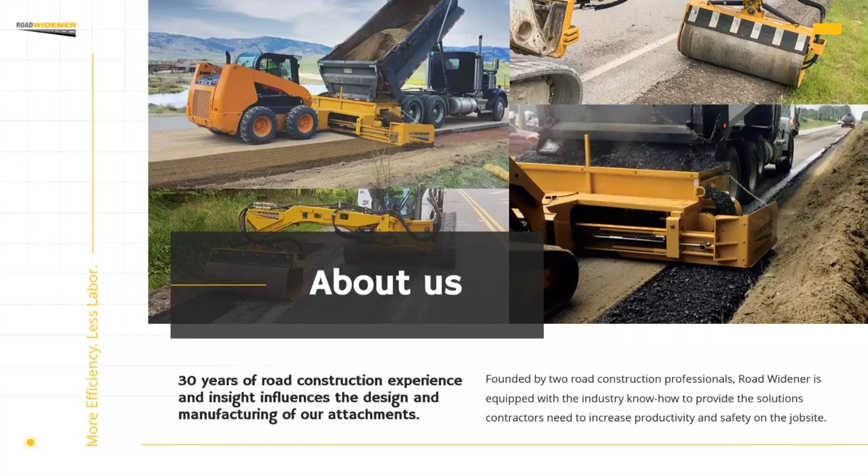We continue to improve on existing lines, as well as develop even more innovative construction products that will help our industry thrive. We are always listening to the voices of our customers, and if there are any pain points that you feel attachments could help with in your daily lives, we'd love to hear from you. While at first our products were designed for the road construction and maintenance industry, we're now seeing a market for our attachments in the utility construction sector, primarily for trench backfilling and trench compacting.

Today, we will go over some of the opportunities to address challenges within the utility market with specialty attachments. I'll also share a couple of case studies on how attachments have been used effectively in other operations. The goal of this webinar is for you to come away with information on how you can increase efficiency, safety, and productivity through the use of attachments in your operation.

Some of the current trends in utility construction are prompting many utility operations to consider new solutions. Investment in utility projects, both here in the U.S. with the infrastructure bill and around the world, is at record levels. It is estimated that there will be $952 billion spent by 2026 globally on utility system projects. Safety is a top priority with campaigns such as Road to Zero and strict safety regulations in general. Today alone, I read that the OSHA Directorate of Construction stated that a worker is 3 times more likely to die on a construction site than in general industry. So safety is really important.

In trying to keep the job site footprint smaller, it requires smaller, more compact equipment. If you are dealing with traffic situations, attachments versus larger machines can help to reduce the amount of space that you're taking from traffic flow. Hiring and retaining people is difficult, so we need to be looking for ways to accomplish tasks with fewer people. A growing utility market requires increased efficiency from operations, completing projects on tighter deadlines. More projects exist, yet the timelines are not changing, or expectations aren't changing.

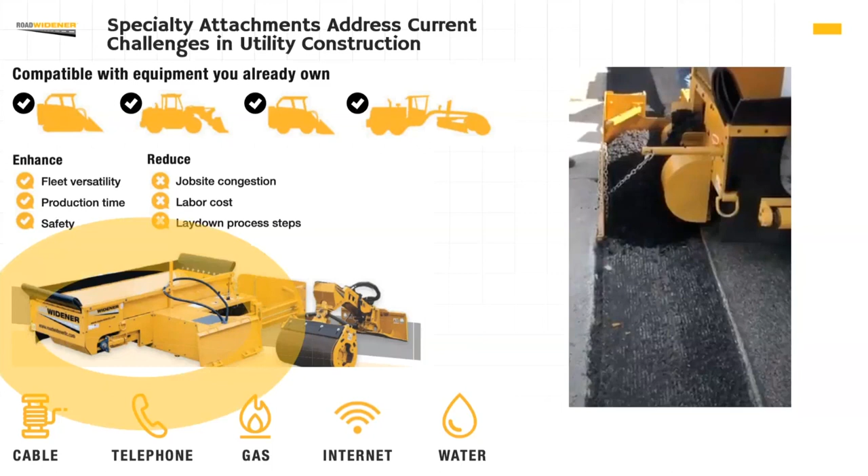Material placement attachments allow contractors to complete a job that was formerly manual and 4 steps with fewer workers, in just a 2-step automated process.

Material placement attachments are 1/5 the cost of self-propelled equipment, so the return on investment is much quicker with the lower priced attachments.

Material placement attachments offer lower transportation costs because they fit on a common width trailer with their host machines. You don't need an extra lowboy and driver to mobilize the attachments to the job site.

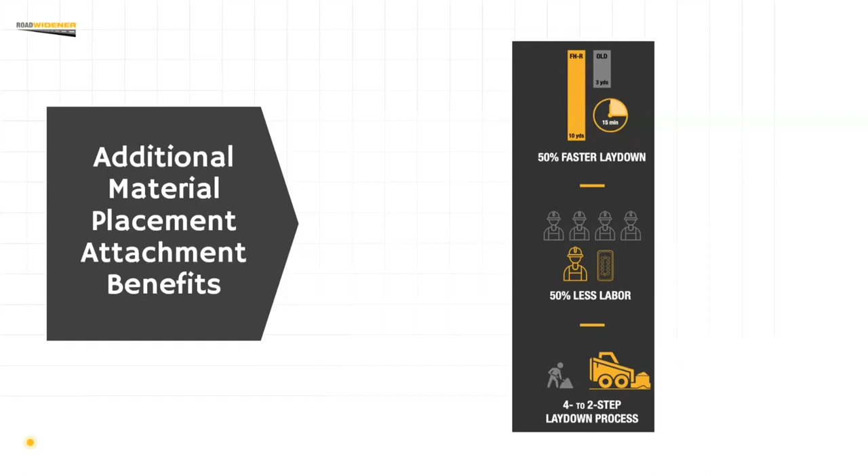Remote controlled operation enhances safety by allowing the operator to stay in the host machine. They're easily maneuverable around obstacles such as power poles, signs, and guardrails. There's dual and single discharge models available with laydown widths ranging from 1 to 6 feet.

The first case study I'd like to share with you is the Siskiyou Telephone Company. They've been serving Western Siskiyou County in California for 125 years, and were seeking alternative methods for their telephone and internet line trench backfilling applications to simplify their process.

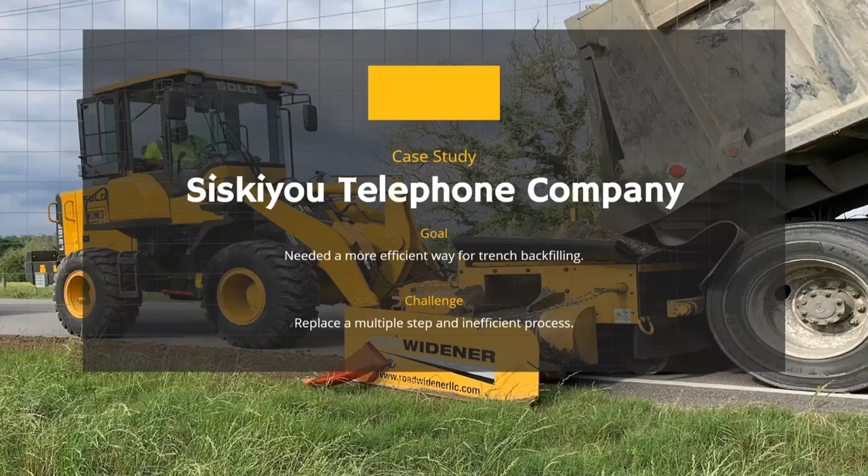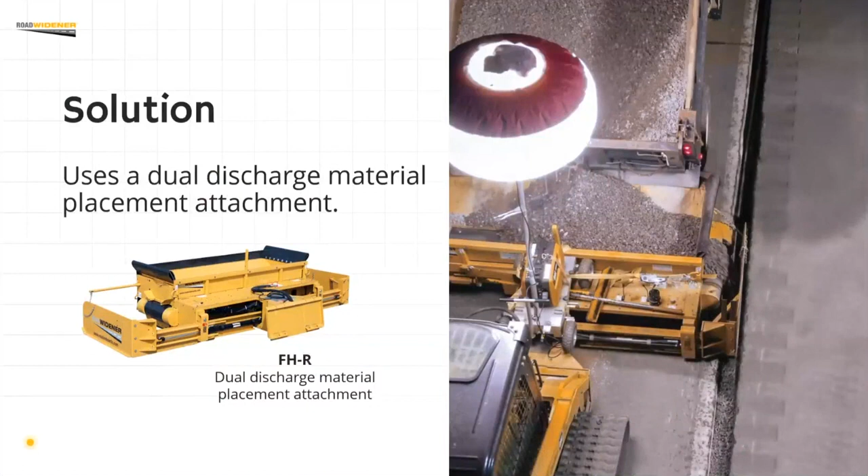Siskiyou worked with their local dealer to try the FHR dual discharge material placement attachment. What did they find after using it? It helped increase the versatility of their existing equipment while eliminating the extensive processes they previously had to take to get the job done. Using a dual discharge attachment allowed them to precisely lay down 1,000 to 1,300 feet of backfill per day.

Using traditional methods, it would take up to 15 minutes to lay 10 yards of backfill material in the trenches, but the company can now do it in as little as 3 to 5 minutes.

Remote controlled operation allowed the contractor to only have one operator in the cab, focused on ensuring a clean line of material along the road, while they assign remaining crew members to other job site tasks.

County officials also expressed their appreciation for the equipment due to its low traffic interference, precise material placement, meaning less debris on the roadway, and the lightweight design minimized damage to the road.

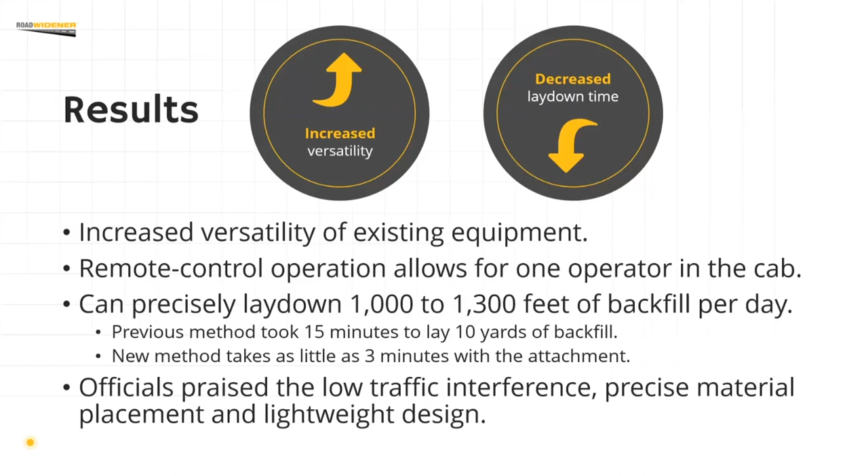The FHR offers unrivaled efficiency by taking what was once a 4-step trench backfilling process and making it achievable in just 2. The attachments seamlessly fit into their business and have significantly improved their trench backfilling, productivity, and bottom line through the equipment's ease of use, accurate material distribution, and quality placement, even in hard to reach places.

Now I'd like to discuss the benefits of roller attachments in the utility construction industry.

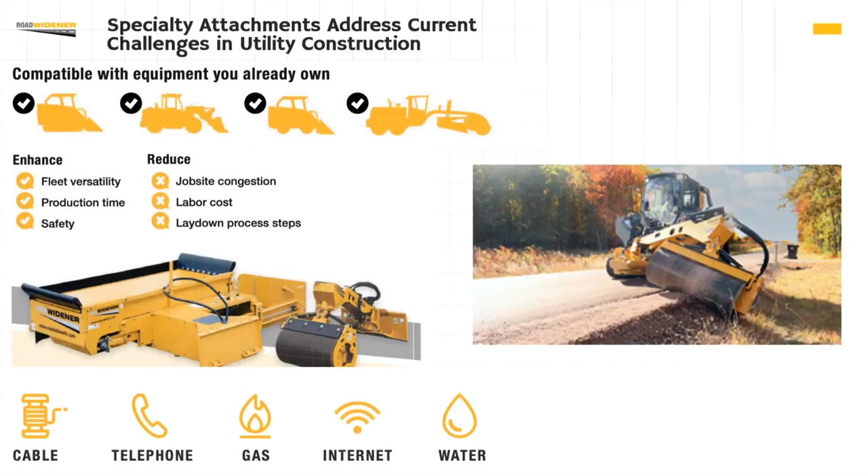Our offset vibratory roller is a patented design. It has unparalleled safety when compacting trenches and otherwise difficult areas to reach. These attachments offer remote control capabilities for convenient and effortless operation.

They work with standard flow hydraulics. It can be used on high flow hydraulic machines, but they must be set to standard flow. The host machines provide a separate source of power for the compaction drum, and thanks to the offset arm, stability and safety for the operator.

With this setup, an operator can now drive the host machine on flat ground while the arm extends to the furthest, steepest edge of sloping road shoulders and ditches, while still being able to compact flat surfaces too.

We often hear at trade shows how, oh, Joe tipped over the roller last week. Luckily, Joe is usually still here, but we have had customers who came to us to purchase a roller shortly after having a serious accident involving an employee, and unfortunately, a few of those were deaths.

I don't think any of us as employers ever want to send an employee home injured, or even worse, not home at all. If you look at it this way, an attachment investment is equal to one workers' comp claim. I know from my financial days, it was always about trying to keep costs down by keeping safety of utmost importance. You can lower your insurance premiums and increase your safety ratings with offset compaction attachments.

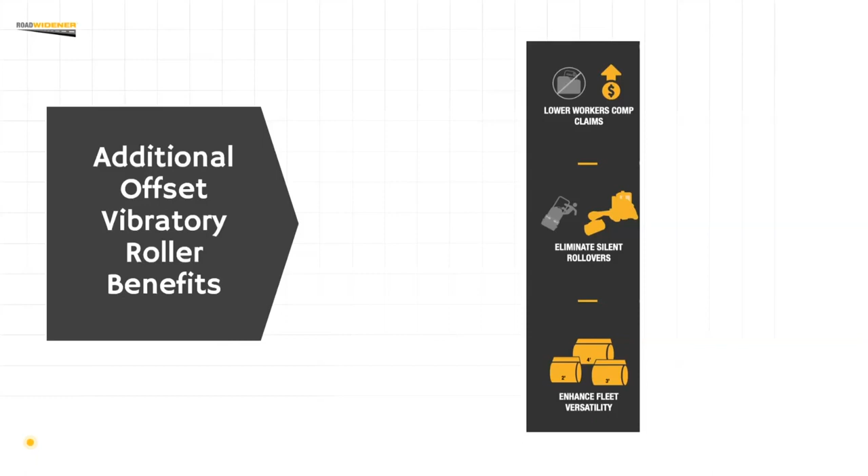We offer accessories such as a sprayer bar, which helps with either dust mitigation or for using with asphalt so that asphalt does not accumulate on the drum. We offer that with both tanks and a tankless system if you already have tanks on your host machines.

The next case study I'd like to talk about is the New Hampshire DOT, which participated in a study to test Road Widener's offset vibratory roller attachment against 2 comparably sized self-propelled compactors. Both rubber-tired and steel drum rollers were tested in 2 positions over each material placement method, 1/2 inch up and flush.

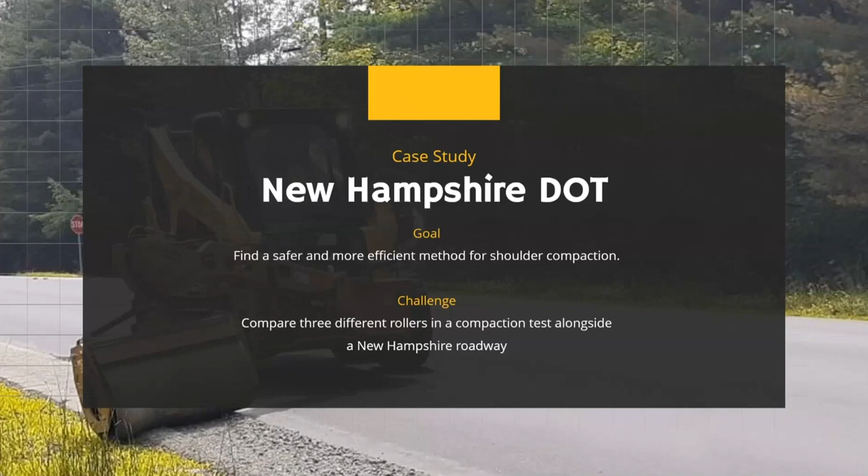The first position was straddling the material placed. The second was with the drum mostly upon the pavement and the rear wheel up on the gravel being placed. Road Widener was only tested for vibratory because with the drive unit being on the pavement, there was no concern of flipping the unit, so vibratory can always be used.

The results for this compaction testing: the material is placed 2 ways for each roller. First, approximately 1/2 inch higher than the existing pavement prior to compaction. Second, the material is placed flush with the existing pavement.

Road Widener's offset vibratory roller had almost equal compaction when tested against 2 other rollers of greater weight. We had the least variance of the 3, looking at the average compaction across the entire shoulder. This goes to show that the offset vibratory roller consistently packs material wherever necessary while offering incomparable safety to the road crew by allowing the operator to stay on the flat roadway.

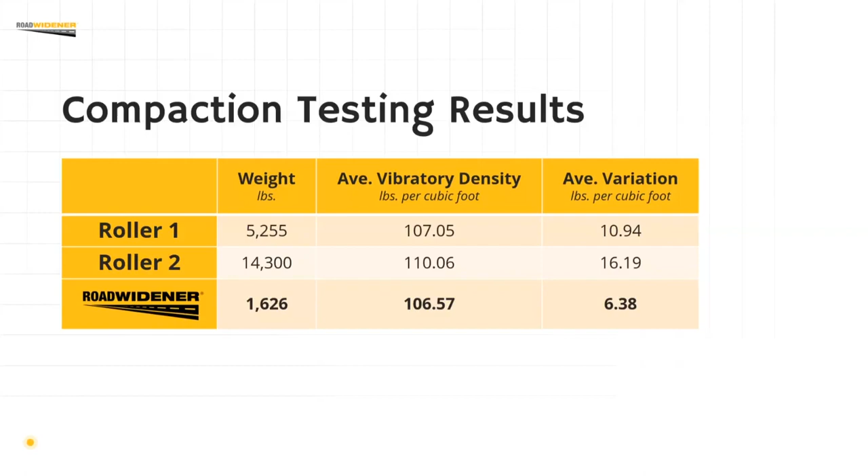Another case study is Vance Corporation. They're a company in California that specializes in grading and paving for the installation of fiber optic cable.

Vance Corporation demoed and purchased a material placement attachment that was just a single discharge, to use in their grading and paving operation.

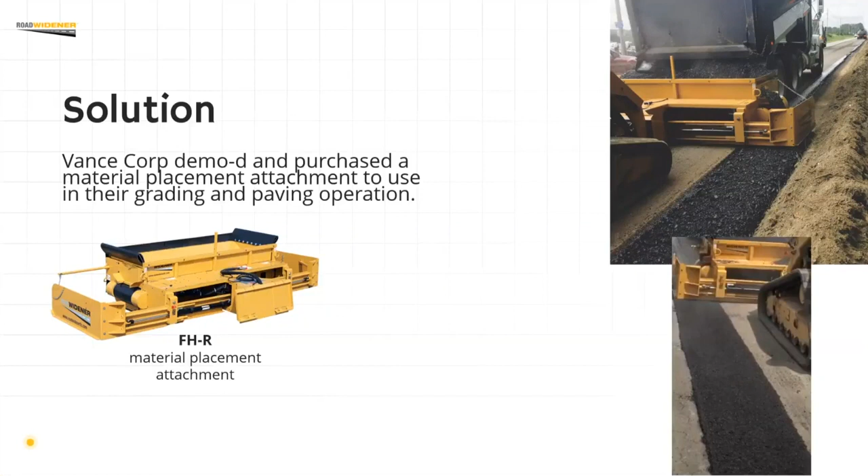They saw a significant increase in productivity with fewer crew members. They went from installing 2,000 feet per day with 5 to 6 members to 4,000 feet per day, literally doubling, with 4 to 5 crew members.

They also cut down work time in intersections, lowering the impact to traffic as well as providing more safety for their employees. They talked about having to time their work in between stoplights going on and off. The vice president said it boosted operational efficiency by a minimum of 50%.

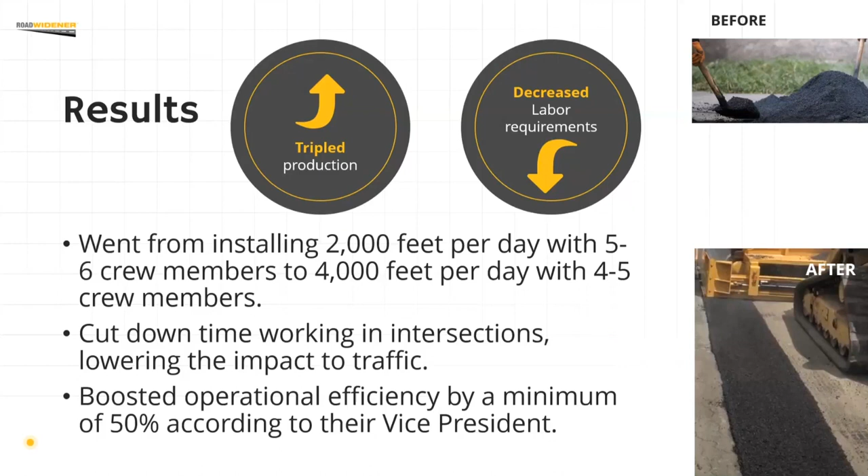There are many attachments to consider. An efficient attachment saves fuel and labor. Consider the ROI and timelines. Again, attachments will cost significantly less than full ride-on machines.

You can also rent attachments, and there's an ROI consideration there too, because sometimes you can't always rent it—they're not all available at that time. So it's about seeing how often you're using attachments and whether renting versus buying is better.

Also consider the host machines you have and what attachments work with them, taking into account the weight, the lifting capacity, and the coupling technology. Our attachments will fit on any unit because it has a skid steer universal plate on it. We also have adapter plates so that people can put it on wheel loaders and graders.

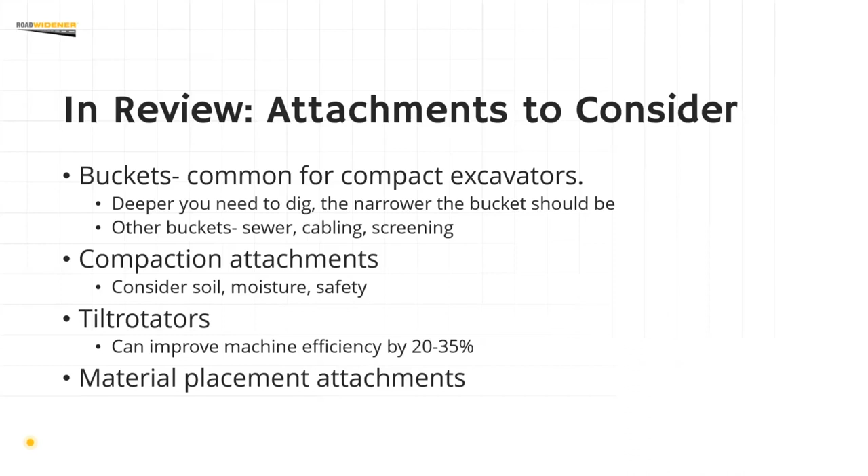Trench backfilling and trench compaction are done faster with the use of attachments. They improve safety, reduce labor requirements, allowing you to take on more jobs because fewer crew members are needed for one job. It increases your equipment versatility.

The attachments allow a single host machine to be used for more purposes. It allows contractors to do things that they may have had to contract out previously, and even provide the opportunity to expand into other business functions in the future. And as seen in the Vance Corporation testimony, it can reduce congestion in intersections, making the job safer and more efficiently completed.

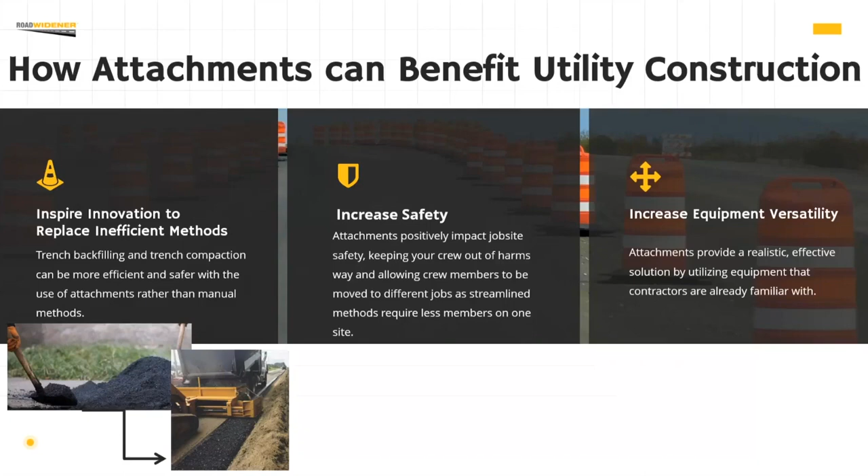And that's all I had for today.